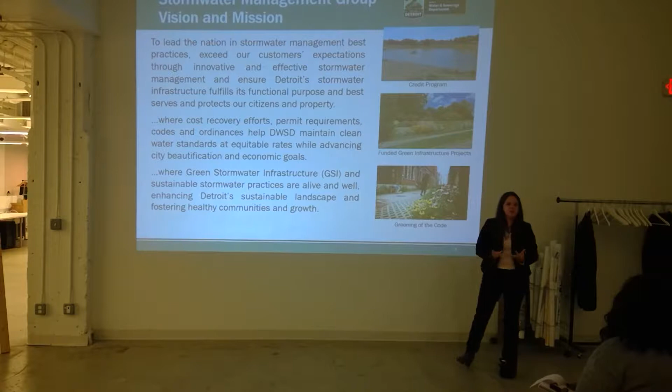I like to use the context: you can fit the footprint of Boston, San Francisco, and Manhattan all within the physical footprint of the city of Detroit. We have a lot of square miles for the city of Detroit, and there's a lot of vacant land, which means a lot of opportunity to manage stormwater and continue to reinvent and reimagine that land in a different way.

And we have a permit to make sure we're meeting the requirements of that permit. Now, just in case anyone doesn't know, the federal government sets the requirements of what we need to comply with, but in the state of Michigan, the Michigan Department of Environmental Quality is the regulating authority. So our permit is with the state of Michigan, who is basically acting on behalf of the federal government.

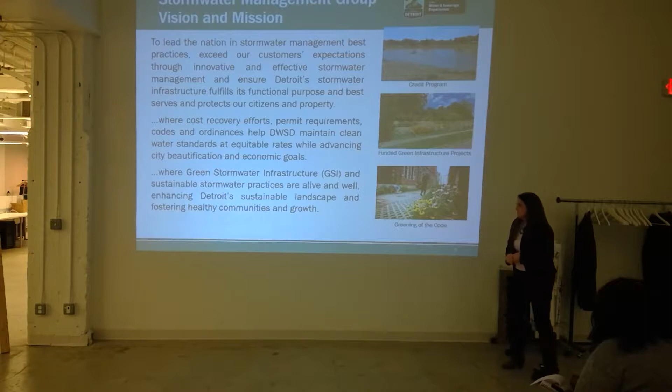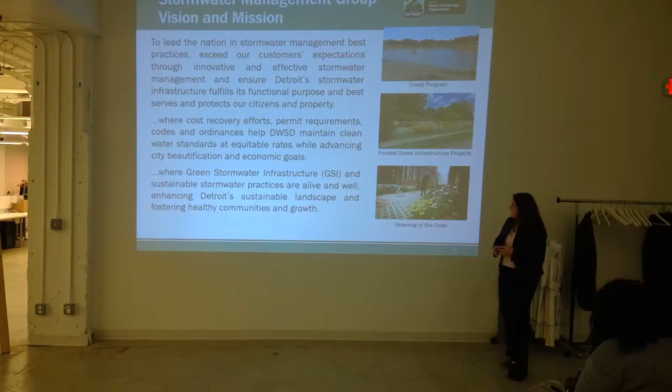And we don't want to just build green stormwater infrastructure to comply with our permit. We want to make sure we're doing it in a way that provides all the other benefits that green stormwater infrastructure provides, which is beautification of the neighborhood, stabilization of our neighborhoods, wildlife habitat, all those other warm fuzzy, I call them, benefits that are really important to a thriving, healthy community.

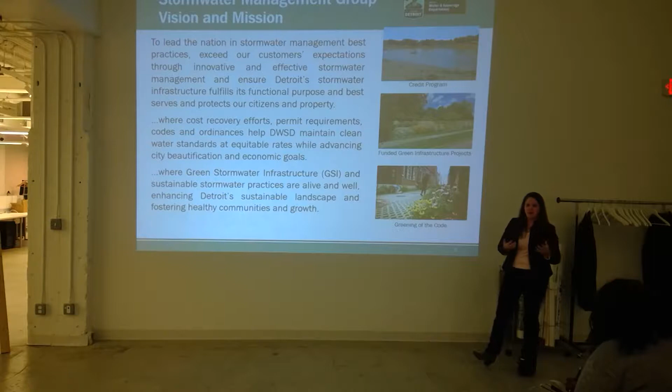We have three main initiatives in the Stormwater Management Group. The one in the middle is basically our permit compliance of building green stormwater infrastructure in lieu of the $1 billion tunnel that was proposed along the Rouge River.

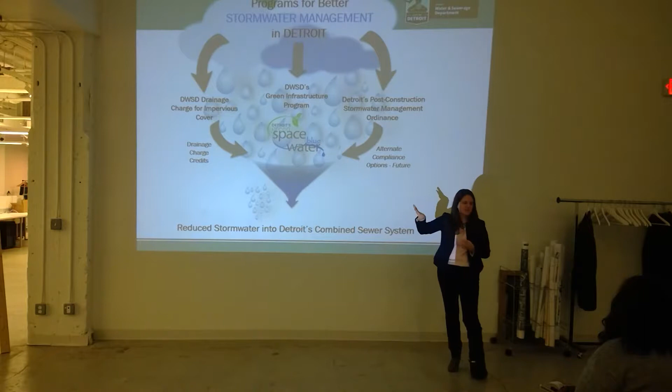So to back up just a second, I mentioned in the beginning that the City of Detroit is about 95% complete with complying with the federal government's requirements for treating that combined sewage and stormwater. The other 5% is projected to cost another $1 billion.

So DWSD successfully negotiated with the state to say, hang on, let's try this a different way. And so we're working on installing green stormwater infrastructure to manage that water and try and meet the permit requirements. So that middle prong there is really to meet our permit requirements that we're required to do.

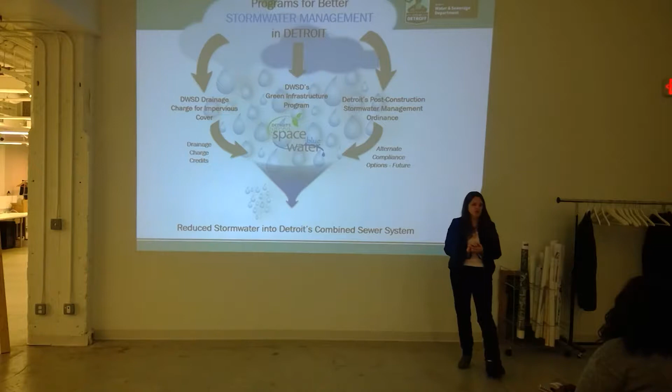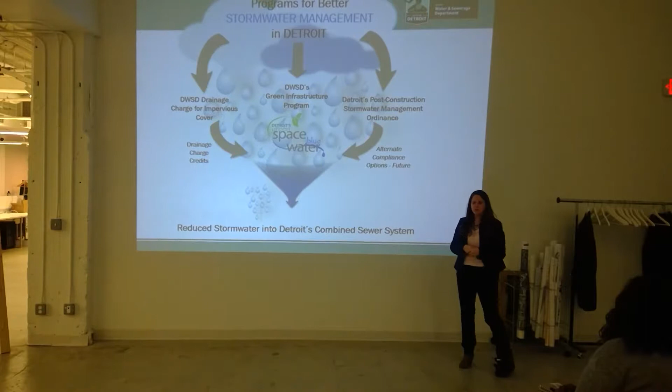As part of that, we are under an obligation to develop a post-construction stormwater management ordinance. Today, in the city of Detroit, if you develop new or redevelopment, there is no requirement to manage the stormwater. If you go to any of the surrounding communities, there's generally a requirement when you're doing new or redevelopment. We are working on developing an ordinance to require new and redevelopment projects to manage stormwater.

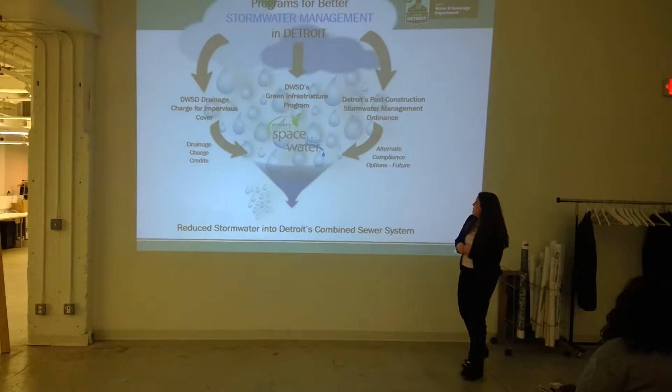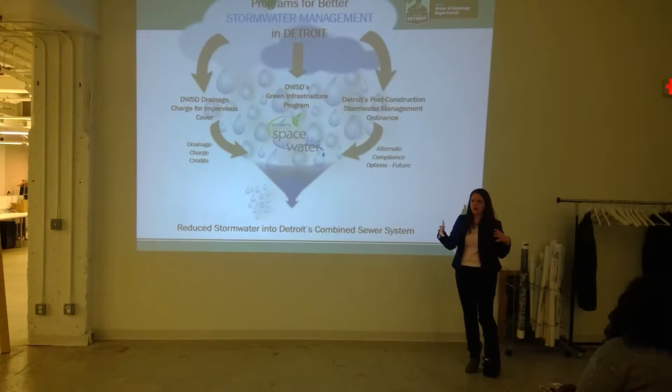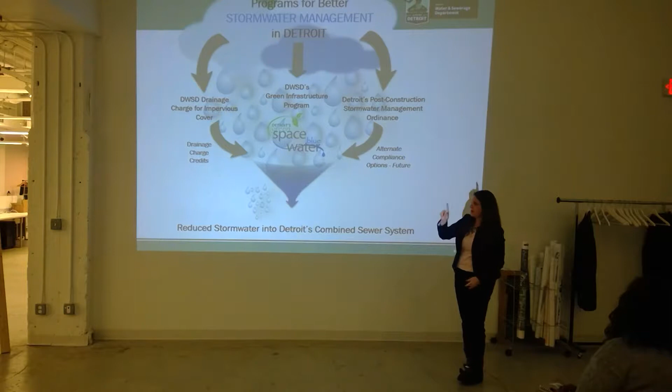So I'll talk a little bit about that later. And then the other prong is the drainage charge. The purpose and intent of the drainage charge is to recover the revenue requirement to manage the wet weather infrastructure. When I say wet weather, it's when it rains, combined with our sewage, all the infrastructure it takes to manage that water is what the drainage charge is in place to recover.

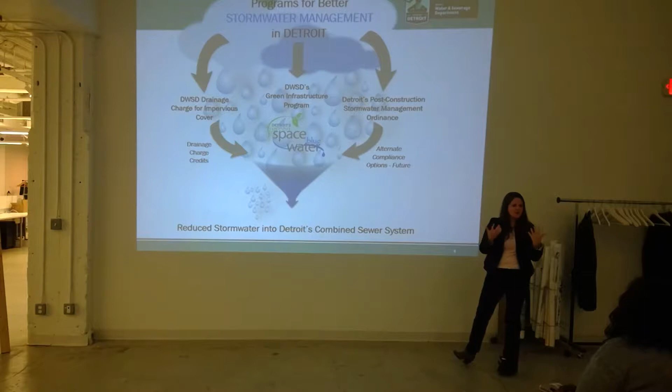And then there's the drainage charge credit program, which is probably how you all tie in when you're looking at doing vacant lot stormwater management. You can get a drainage charge credit for managing that stormwater.

Our ultimate goal is to remove stormwater from the combined sewer system. The less stormwater we have in the combined sewer system, the less treatment costs we have, the less operation and maintenance, and the less additional money we need to spend on infrastructure to get us to 100% compliance. That's done through a variety of approaches, including the drainage charge credit program.

DWSD is constructing $50 million worth of green infrastructure. And then there's the post-construction stormwater ordinance piece.

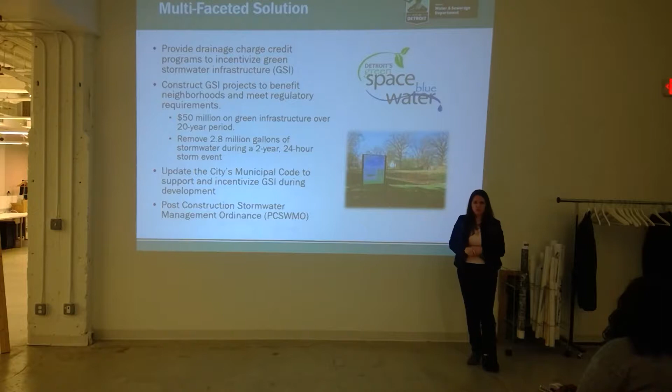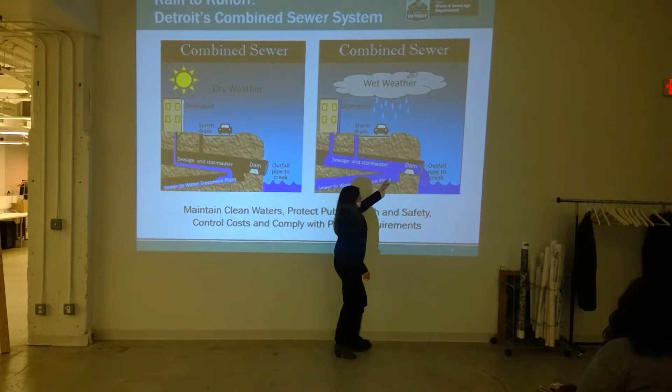I think I covered this. This is just a visual of a combined sewer system. So when it's not raining, our sewage comes out of our buildings and is directed straight to the treatment plant. When it rains and the system can't handle that, part of the water overflows to our local waterways, and we are required to treat that to a certain standard.

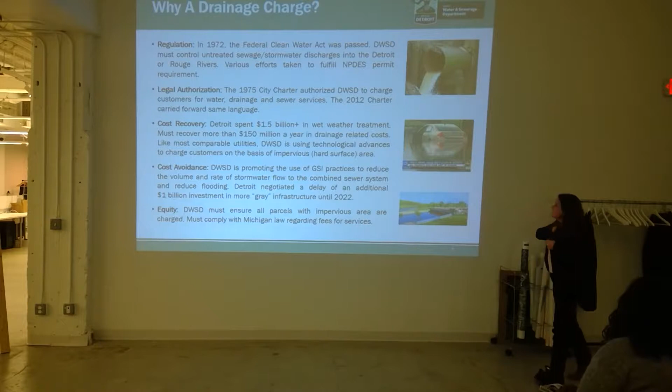So, why a drainage charge? Well, we are required by the federal government to comply with the Clean Water Act and control our untreated sewage, which is the wet weather infrastructure. And there's a cost associated with that, and that cost has to be recovered because it is a service that DWSD is providing.

And how many folks know that the drainage charge is not a new charge? A couple folks, okay, I'm going to repeat that. The drainage charge is not a new charge. It was authorized by the city's charter back in 1975 and was reauthorized in the 2012 charter. The reason it might appear new is that previously it wasn't a separate line item on the bill, it was embedded within the sewage line item, and DWSD pulled that out as a separate line item to be transparent about all the different components of the charges on the utility bill.

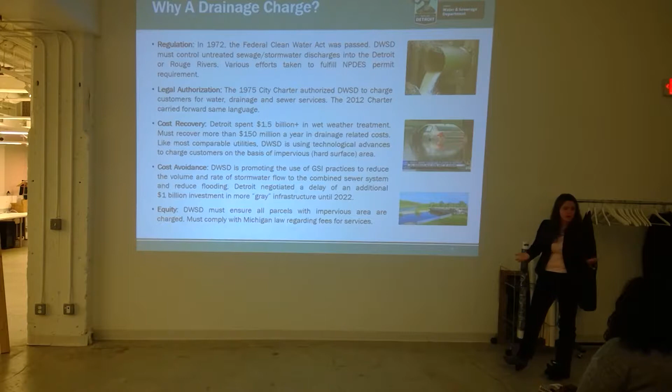The cost recovery - all that wet weather infrastructure that's already gone into the ground, we have to recover the costs of both the debt services and the overall operation and maintenance of that infrastructure. And it costs a lot of money to treat a lot of water. Cost avoidance - we're not done meeting our federal permit requirements, so the more stormwater we get out of the system, the less infrastructure we have to build in addition to what's already in the ground.

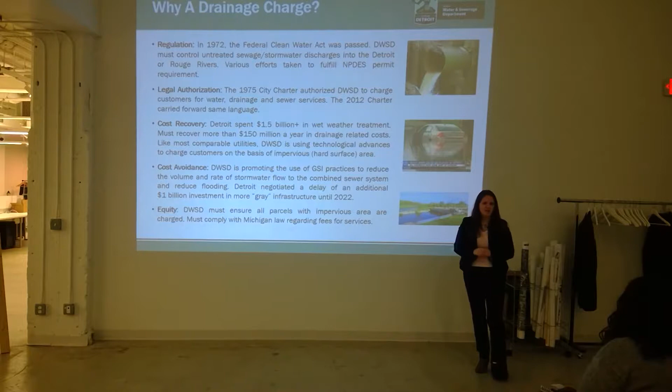And I talked about the negotiation with including green stormwater infrastructure to delay those costs, but I can assure you that Michigan regulators are very much firm on making sure that we meet our deadlines and our commitments with the remaining infrastructure that's left.

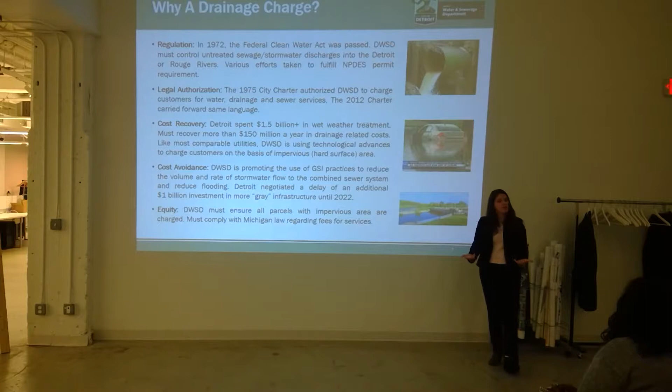So previously, drainage charges were tied to a water service. So you might think, well, what happens to the folks that didn't have a water service? Think a commercial parking lot - they don't use water, they don't typically have a water connection. Well, what we found through our efforts and through a lot of scrubbing of the data is that they weren't being charged for drainage. So part of our program is to make sure that everybody is charged for the hard surfaces that they have on their property.

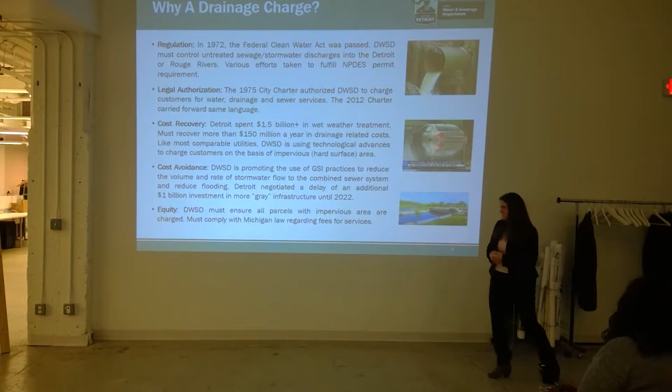And that's also to make sure that we're meeting the Michigan laws that we have to abide by. We're providing a service and we need to recover that cost.

As I mentioned, there were about 22,000 parcels that we found, because they didn't historically have water service, were not being charged for drainage. So those property owners were one of the first in the implementation plan to be brought into the system, to make sure that yes, indeed, everybody is being billed for drainage based on the amount that they're contributing.

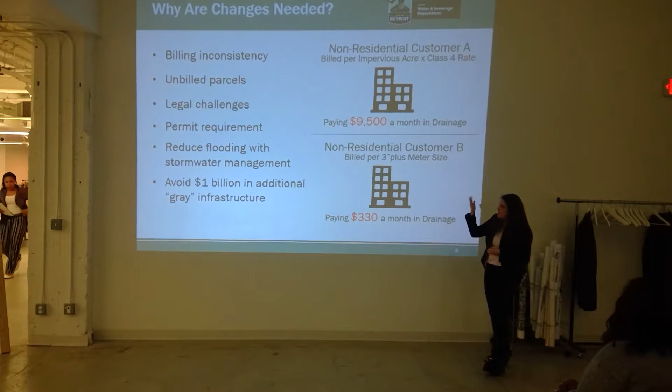Again, this is for our permit requirements and to avoid the $1 billion of additional gray infrastructure.

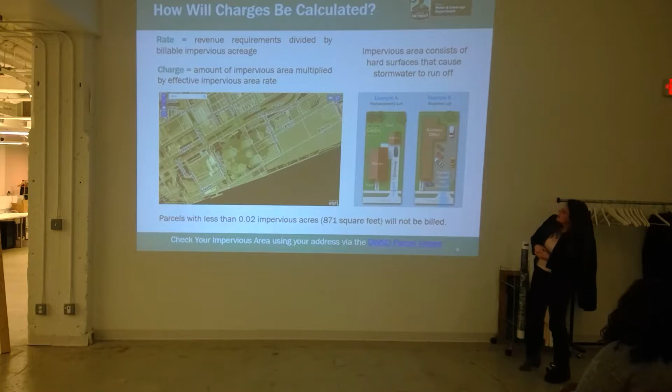Drainage charges: by the end of the program implementation, every parcel will be charged based on the amount of impervious surface that they have. The rate is basically how much money we need to collect divided by the amount of impervious surface in the entire city, which today is $661 per impervious acre. That's a really important piece, that it's per impervious acre. So if you have 0.1 impervious acres, it's 0.1 times 661. If you have 1 impervious acre, it's 1 times 661. And yes, that's per month.

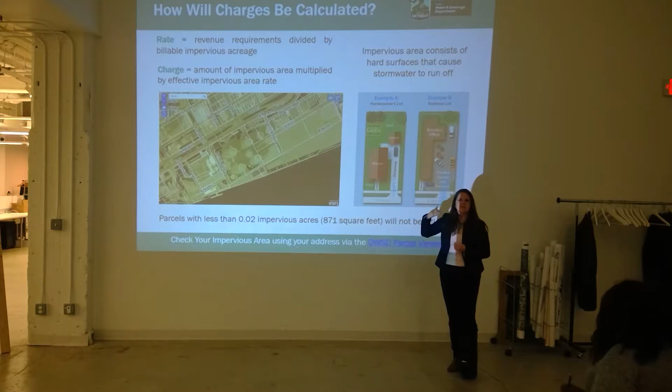If you don't know how much impervious cover you have, DWSD has a public parcel viewer you can access. Type in your address and click on your parcel. This will be the screen you see. Just like a regular Google or Bing search, type the address in the upper left corner, hit search, and it'll zoom into that property. If you select that parcel, it'll bring up the amount of impervious acres on that parcel. Take that impervious acreage, multiply by 661, and that is the drainage charge for that parcel.

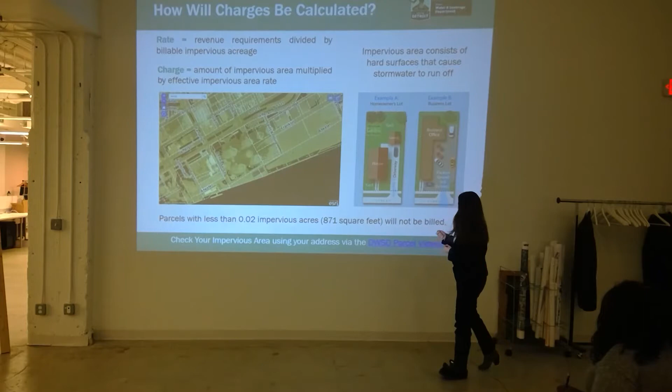How do you get there? It's on DWSD's website, which is detroitmi.gov/drainage.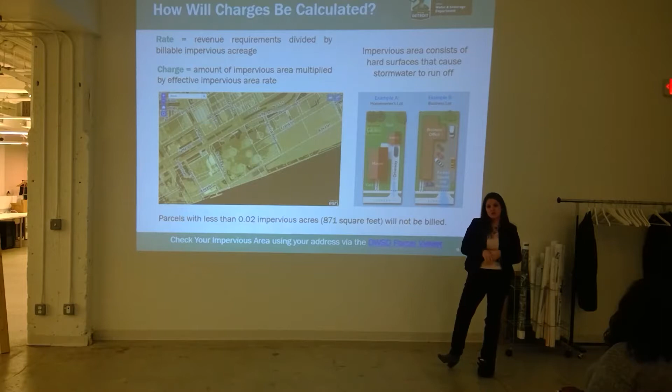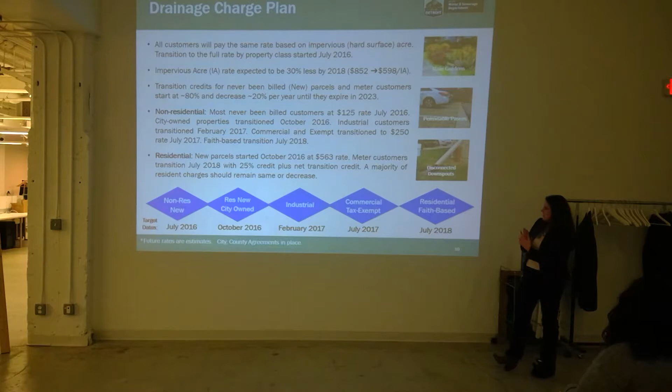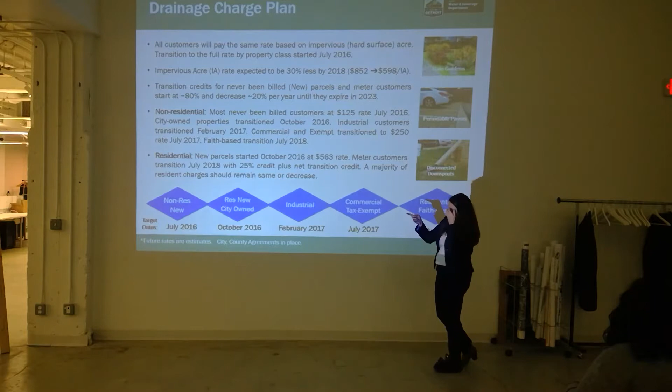Due to a limited amount of resources, time, and energy, and the amount of work it takes to scrub the data and make sure the implementation plan going forward is right, it takes a little bit of time. So we've phased our implementation over a 2-year period. It started in July 2016. July and October 2016 is when new parcels that had previously not been billed were brought into the billing system and began billing, and city-owned properties were converted to the 661 per impervious acre rate at that time.

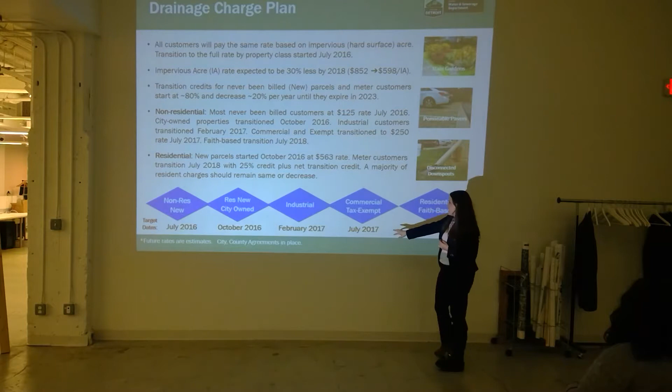Industrial parcels were transitioned to the impervious area method in February. Then this summer, commercial and tax-exempt parcels transitioned. Then in July 2018, residential and faith-based parcels will be transitioned. At that point, every parcel in the entire city will be billing on the same basis.

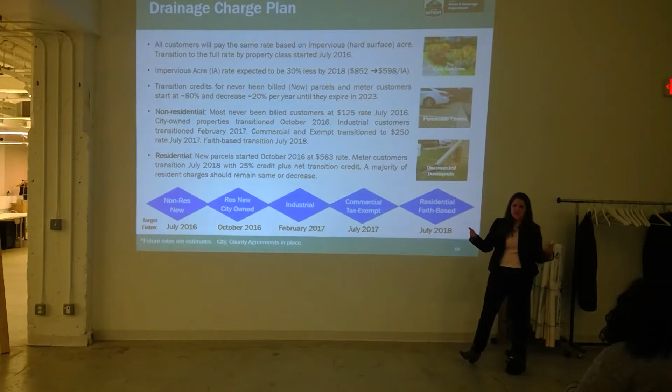So 661 per impervious acre per month is really high. I'm not gonna lie, it's probably one of the highest, if not the highest, in the nation. So one of the next questions is, how do I reduce my charge? There are a couple of ways. The charge is based on the amount of impervious cover you have, so the easiest way to reduce the charge is to reduce the amount of impervious cover on a parcel.

That results in fundamentally a 100% credit on that area that got converted to a pervious surface. There are also transition credits that are applied, and there's a couple of credits that are automatic—property owners don't have to do anything to apply for them. Transition credits apply to property owners going from that meter-based rate to the impervious area rate. The goal is to allow property owners time to prepare for and budget for that change in methodology.

It's over a 5-year period, and the effective drainage charge rate in fiscal year 1 was 125, then 250, 375, 500, and it equalizes out in the 5th fiscal year to 625.

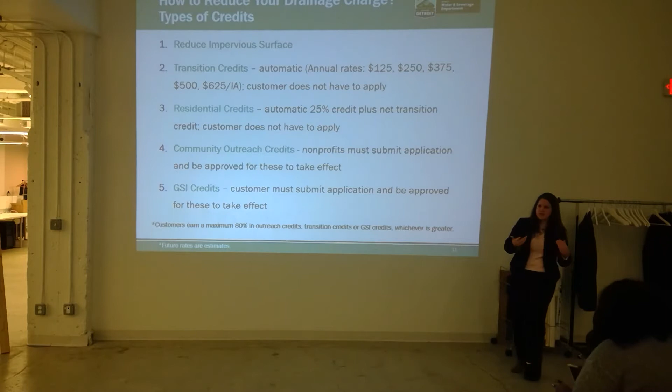Then there are community outreach credits available. For this one, the property owner has to apply, telling us what they did in order to get the credit—it's not automatic. If a nonprofit wants to be a community advocate for DWSD, host an event, and be a disseminator of information for us, there's a credit that can be received for that. That program is supposed to be rolled out publicly within the next couple of months, if not sooner.

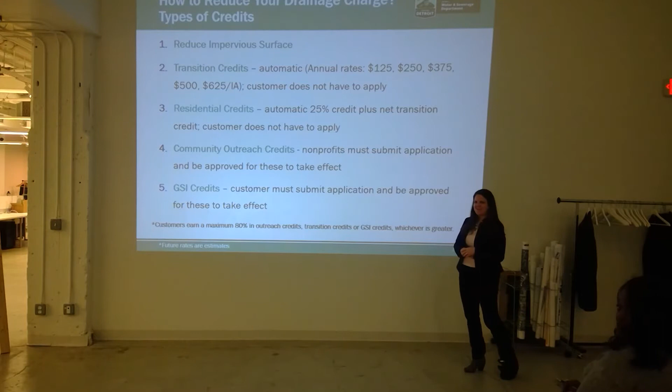November? I heard it was sooner, but I don't want to put you guys on that. I think it's November 1st, yeah. But don't necessarily quote me on that.

One of the other big things is what we're calling the Community Partnership Program. DWSD will provide $50,000 as a 50-50 match to a property owner who wants to install green stormwater infrastructure. So say you have a project that will cost $100,000 and you don't have the money to come up with that—DWSD will provide up to $50,000 of that project to help implement it. That program is expected to roll out, with the application coming out here in the beginning of November.

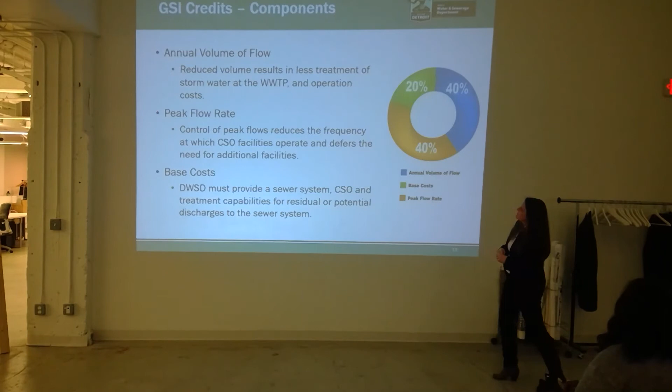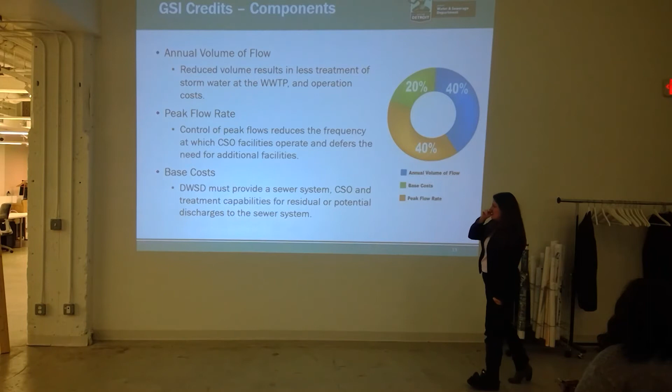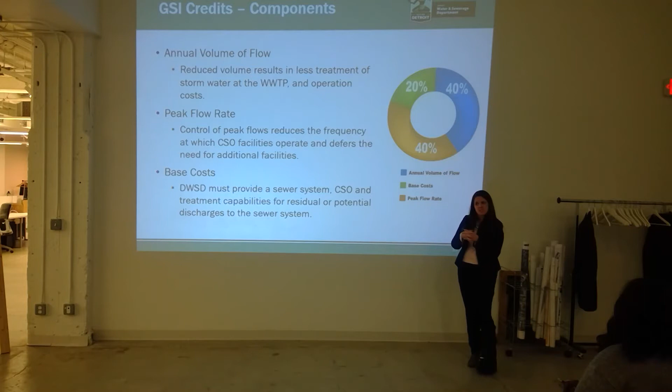Green stormwater credits I'll talk about more in a second. I already talked about the community outreach credits. So, green stormwater infrastructure: there are three main components to the drainage charge bill which you don't necessarily see. The credit program is based on two fundamental ways of controlling the water. One is reducing the amount of water that gets to DWSD's system altogether. You would infiltrate the water, let the plants drink it, or reuse the water through some sort of water reuse system with a large cistern. That is up to 40% credit eligible on the drainage charge line item of the bill.

The second element is how fast the water gets back into the system. Maybe you don't have an opportunity to infiltrate the water for a variety of reasons, or water reuse isn't going to work for your property. There's still a potential to temporarily hold that water on site and slowly bleed it back into DWSD's system, and that's eligible for up to an additional 40% credit. So the maximum credit you can get is 80%. The other 20% is because we have to have a system in place in case and when you choose to connect to the system, and there's a cost associated with that.

The only exception to that rule is if you are one of the lucky few situated in a spot where you can have your own pipe that goes directly from your property—that you own, operate, and maintain—directly to the river, where DWSD would never have to provide a service or connection point for that property to tie into. Then 100% of the drainage charge would go away, because you're not subject to the drainage charge if you're not contributing water to the system.

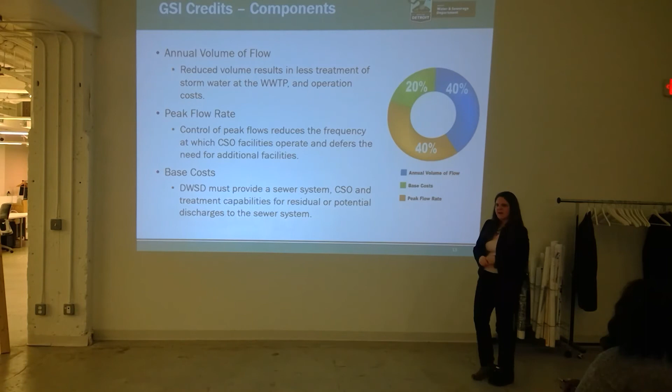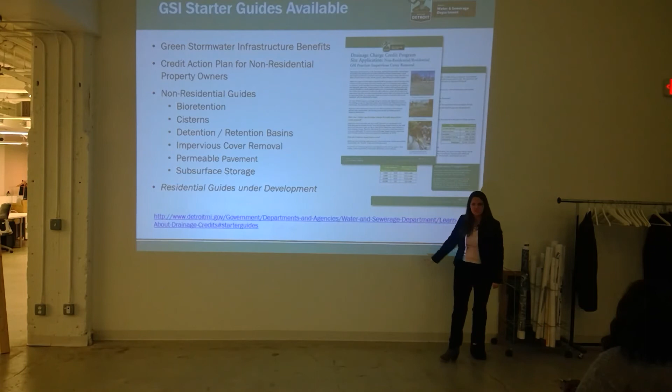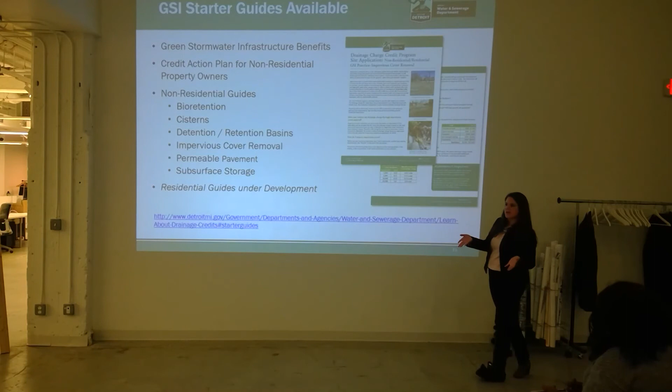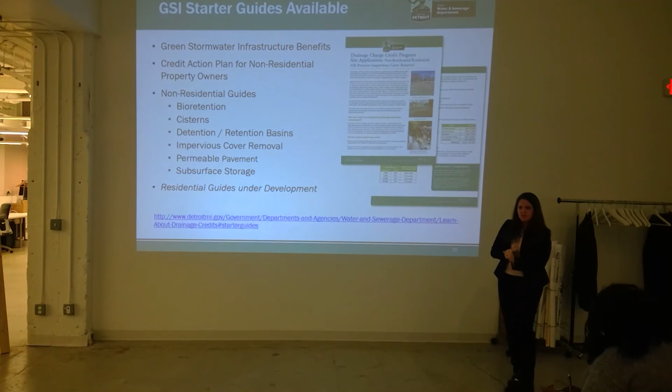Okay, these are the credit eligible practices. This information is all available on our website—we'll keep that one, starter guides. These guides are probably of interest to you guys. Again, DetroitMI.gov/drainage has a connection or link to click on these. These are basically guides that tell you, for any given stormwater practice that is credit eligible, the key information you need to know: the potential credit percentages, the typical costs, key permit things, key design and installation options, and the maintenance elements.

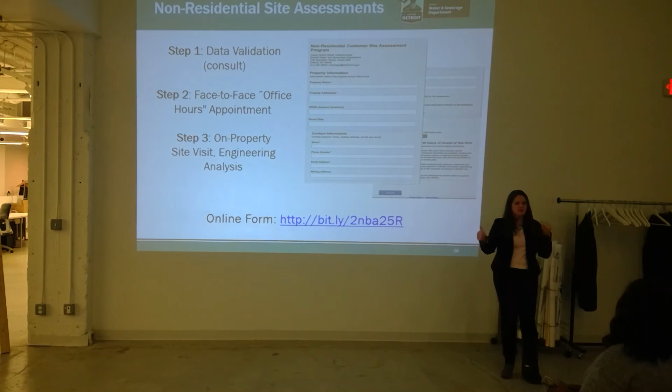DWSD has a program to offer site assessments. That is a 3-step process. This sign-up is available on our website, or if you want to take a screen clip or write that down. Step 1 is data validation: is the data for your property right? Did you sell it? Is the impervious cover not right? Yes, no—we'll work through that process with you.

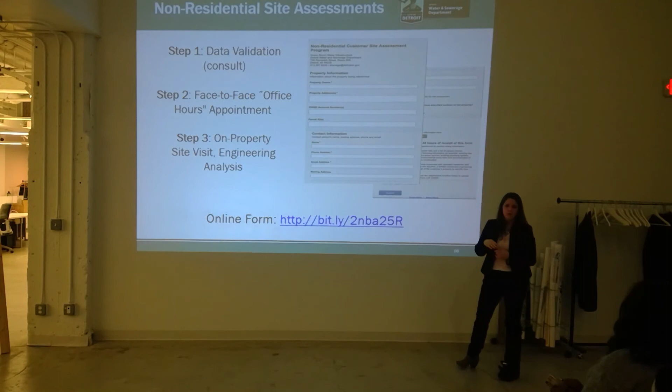Step 2 is we offer a face-to-face office hour—think of it as a brainstorming session to sit down with you and basically go over what potential opportunities for green stormwater you could do on your property, and what type of credit you might be looking at. Then, depending on the complexity and situation, DWSD may send an engineer out to the site to actually do that assessment in the field and provide a report with our recommended green stormwater infrastructure practice.

There are steps along the way. One key thing is DWSD recognizes that it is an investment to install a green infrastructure practice, so DWSD will sit down and do a predetermination meeting. If you have a concept for your property and want to know what kind of credit this is going to get—is it going to make sense for me to do it—DWSD will sit down with you, review that, and basically provide the estimated credit you would get if you went forward with that project. Then, as long as you go forward with that project as presented, DWSD will honor the credit percent that we discussed in the predetermination.

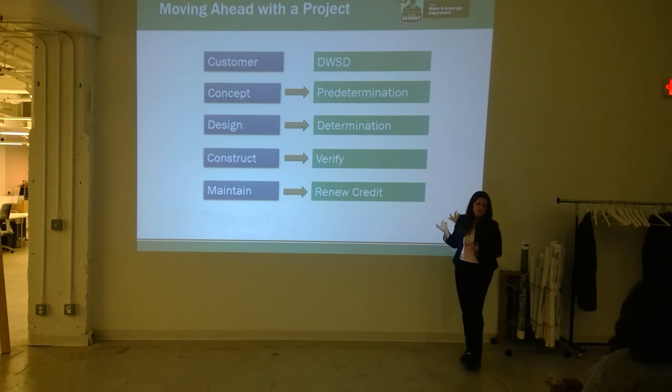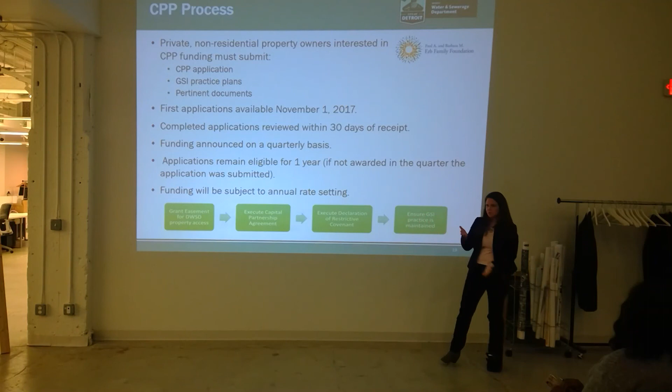This is the partnership program that I talked about, and this is the process for doing it. Applications, we're telling publicly, are going to be available November 1st. The idea is that funding will be awarded on a quarterly basis—every 3 months projects will be awarded—and if your project is not awarded, it will stay in the queue to review for the next quarter, for up to a year.